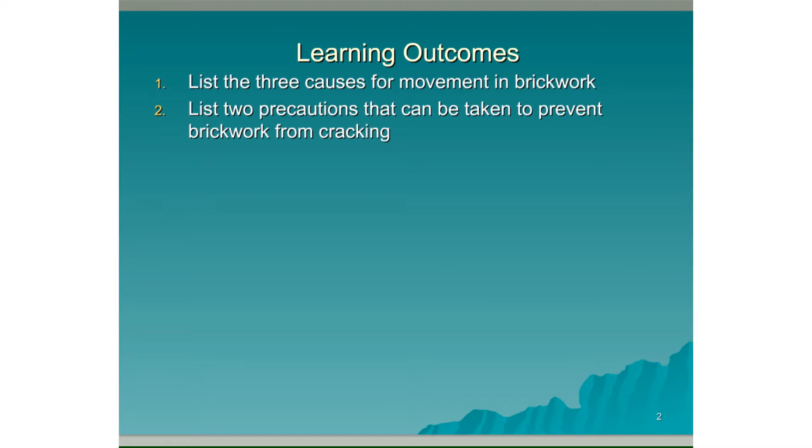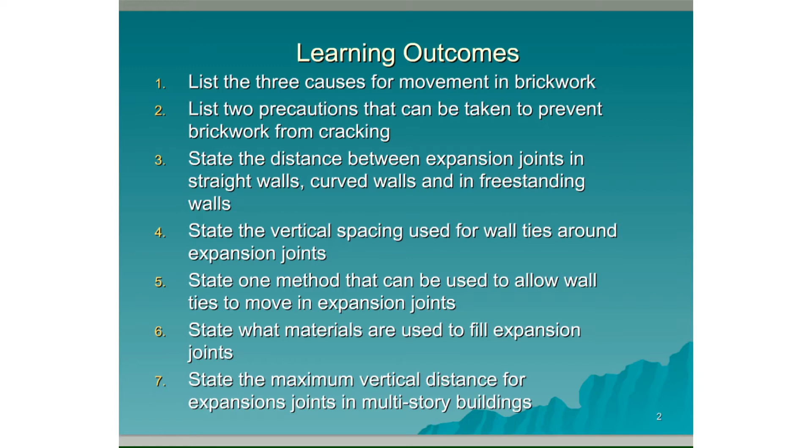Learning outcomes. By the end of this lesson, you should be able to list the 3 causes of movement in brickwork, list 2 precautions that can be taken to prevent brickwork from cracking, state the distance between expansion joints in straight walls, curved walls and freestanding walls, state the vertical spacing used for wall ties around expansion joints, state one method that can be used to allow wall ties to move in expansion joints, state what materials are used to fill expansion joints, and state the maximum vertical distance for expansion joints in multi-storey buildings.

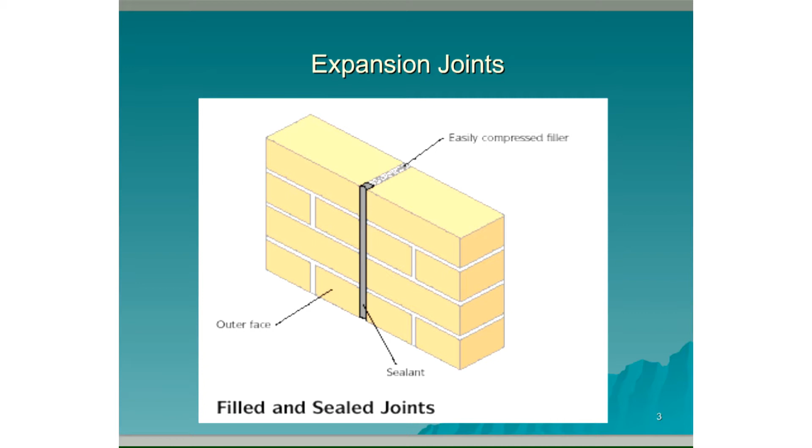Here is an example of an expansion joint made in brickwork. Standard expansion joints are approximately 10 millimeters in width. We can see that the main part of the joint is filled with easily compressible filler, something like Flexcell, and then the outer part of the expansion joint needs to be sealed from the weather, so usually with some kind of silicone.

Expansion joints. All building materials are subject to movement in use. Brickwork is no exception. This movement within the structure is in response to various temperature changes, moisture content, and variation or deformation under load of either the material itself or adjacent materials.

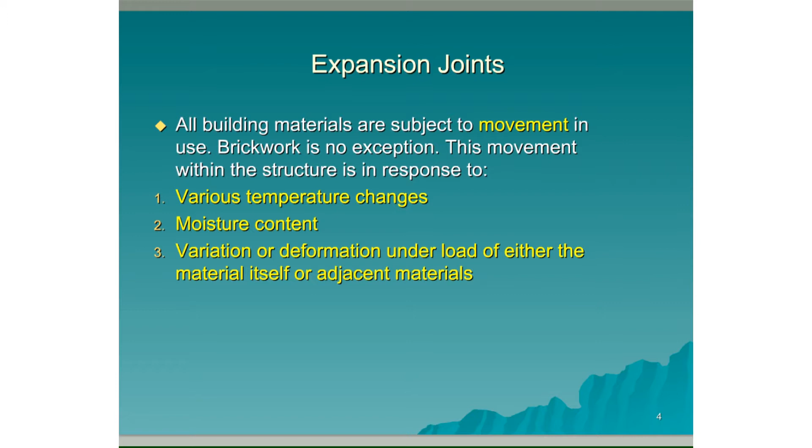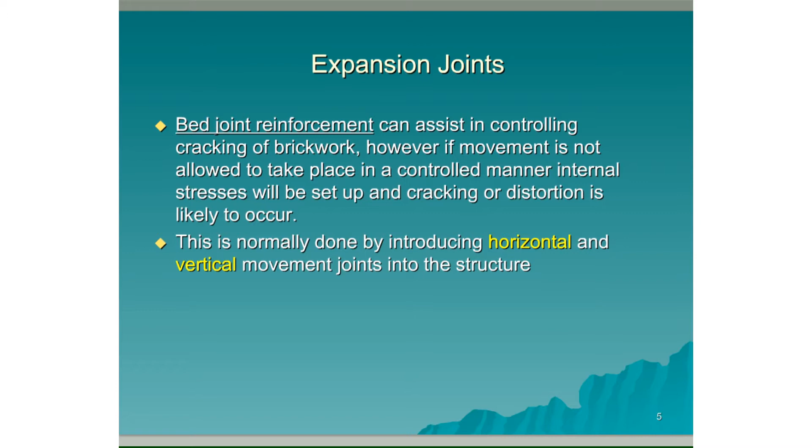Bed joint reinforcement can assist in controlling cracking in brickwork. However, if movement is not allowed to take place in a controlled manner, internal stresses will be set up and cracking or distortion is likely to occur. So we have to allow for this movement. This is normally done by introducing horizontal and vertical movement joints into the structure. Here we can see an example of an expansion joint in a brick-faced building.

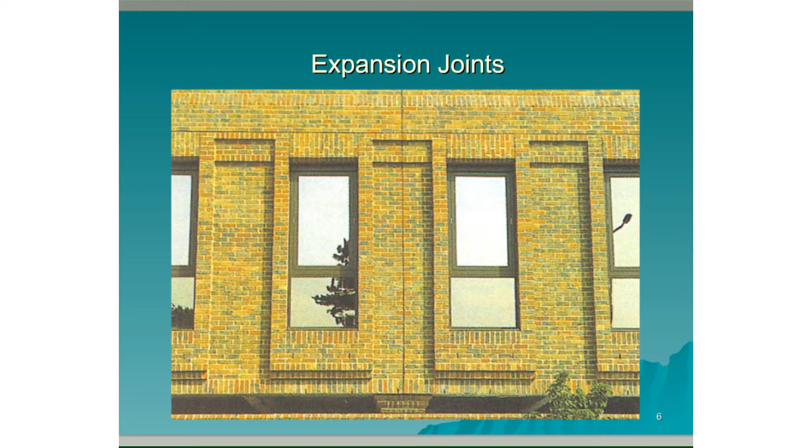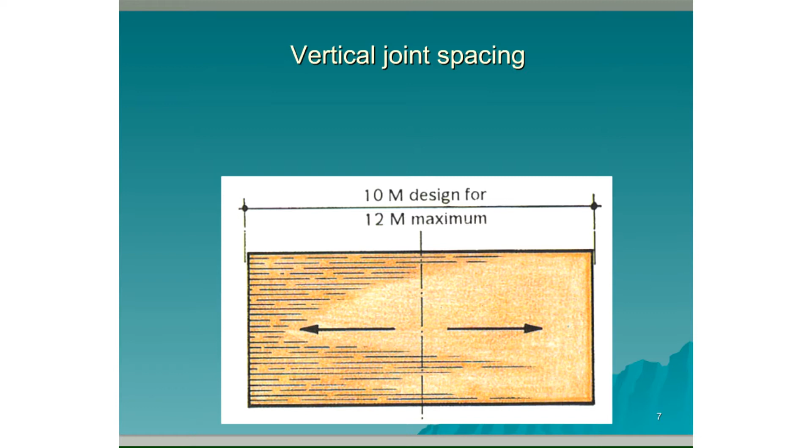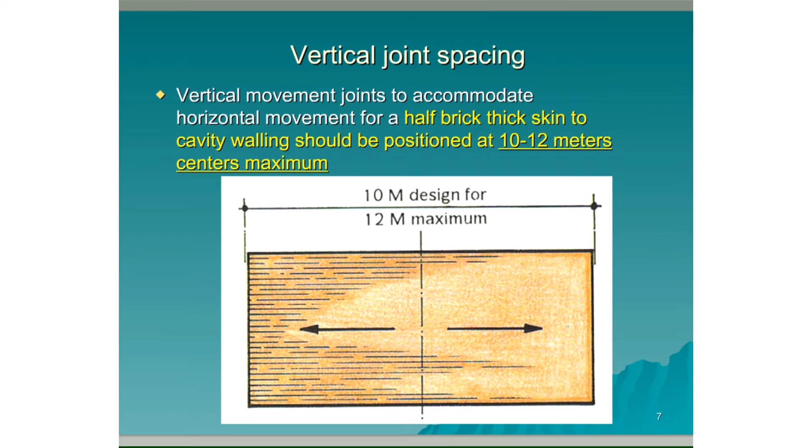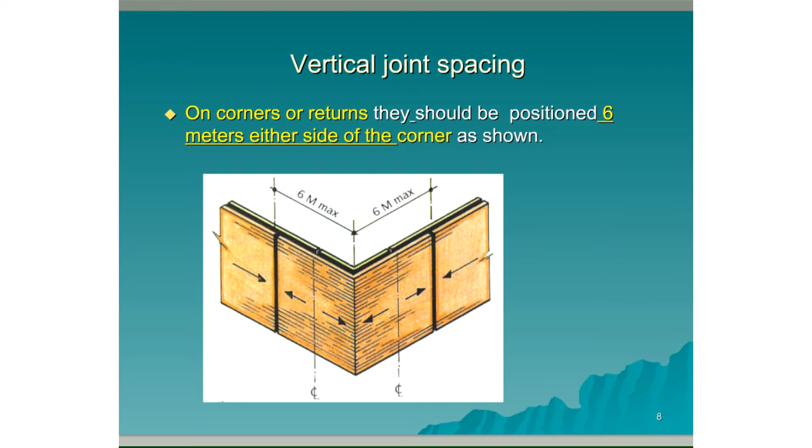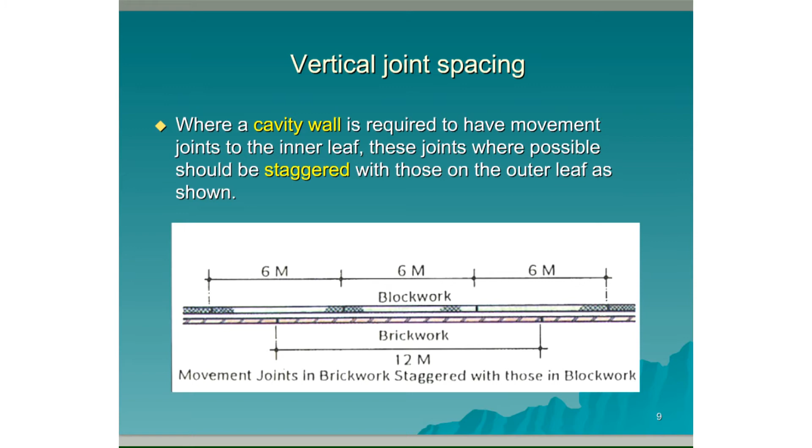Movement joints in brickwork staggered with those in blockwork. Where a cavity wall is required to have movement joints to the inner leaf, these joints where possible should be staggered with those on the outer leaf as shown below. This is to avoid having a major weak spot in the building, and also to avoid the likelihood of moisture penetration through the face of one expansion joint and then travelling through to the inside through another expansion joint.

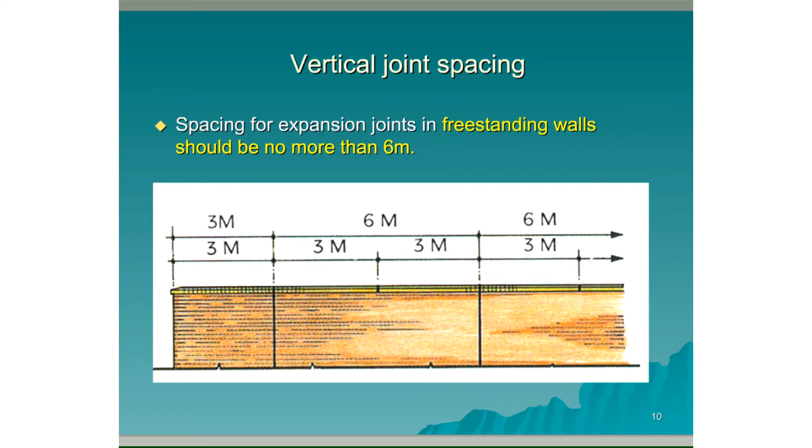The spacing for expansion joints in freestanding walls should be no more than 6 metres apart. It should, however, be noted that copings on these walls should have movement joints at intervals of 3 metres. This is due mainly to their exposed nature and having less restraint.

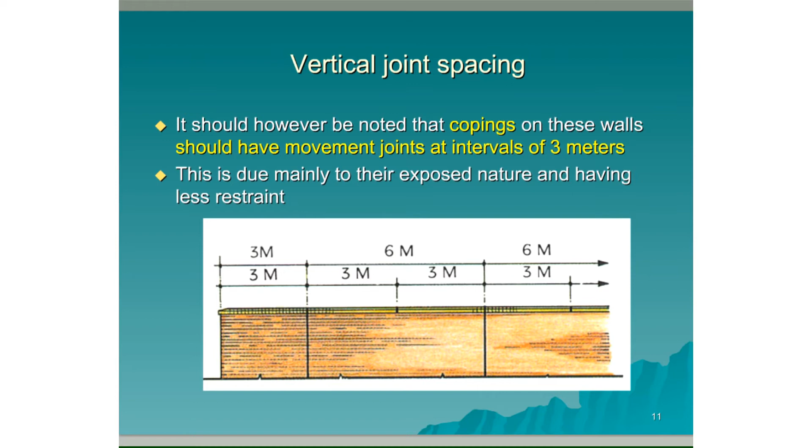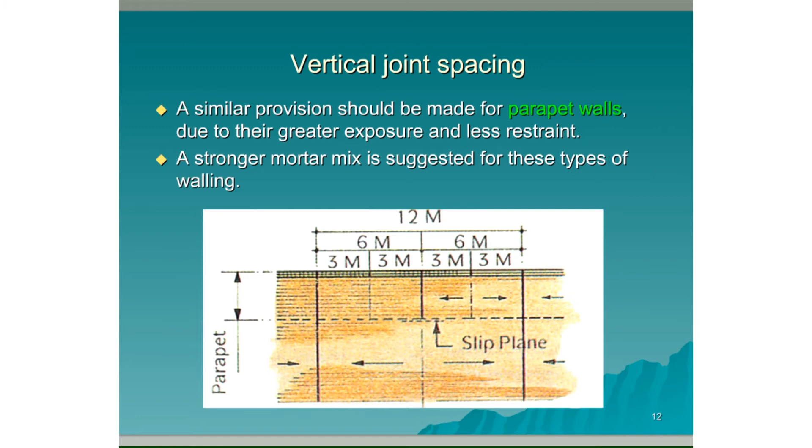A similar provision should be made for parapet walls due to their greater exposure and less restraint to expansion and contraction. A stronger mortar mix is suggested for these types of walls. So we can see for the parapet wall, the expansion joints should be every 6 metres, and on the copings on top of the parapet wall, the expansion joints should be every 3 metres.

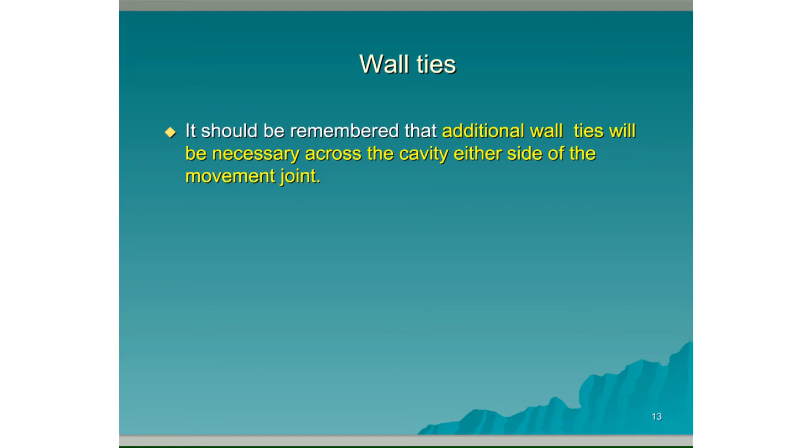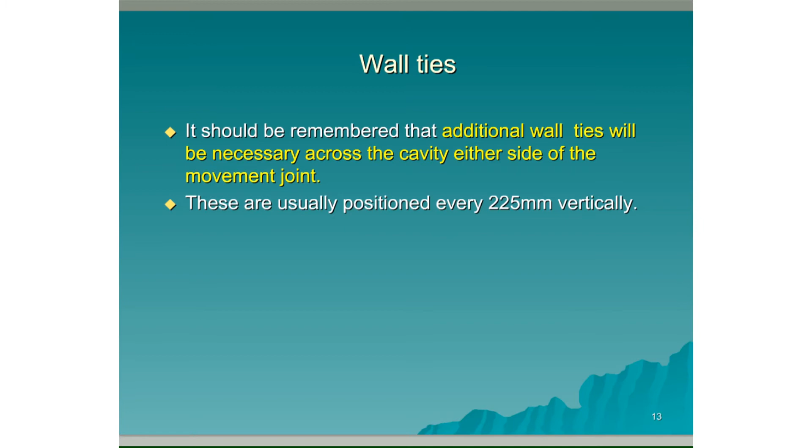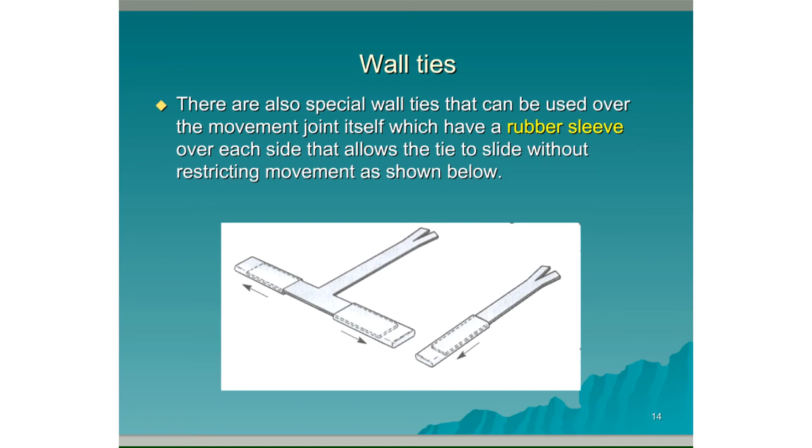Expansion joints. All movement joints should be filled with the correct material, such as a butyl rubber, silicone or Flexcell. The important thing is that whatever filler is used, it's resistant to weather and also allows or doesn't restrict the movement of the brickwork.

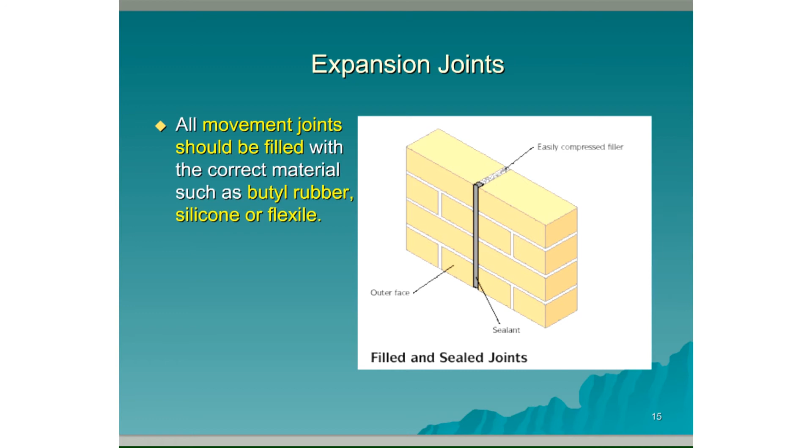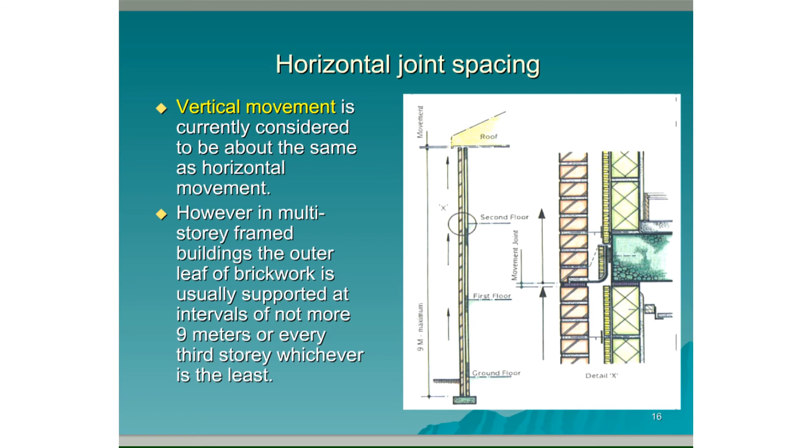Horizontal joint spacing. Vertical movement is currently considered to be about the same as horizontal movement. However, in multi-storey framed buildings, the outer leaf of brickwork is usually supported at intervals of not more than 9 metres or every third storey, whichever is the least. It is common practice to incorporate a support at every second storey, thus providing opportunity to locate movement joints with reduced thickness.

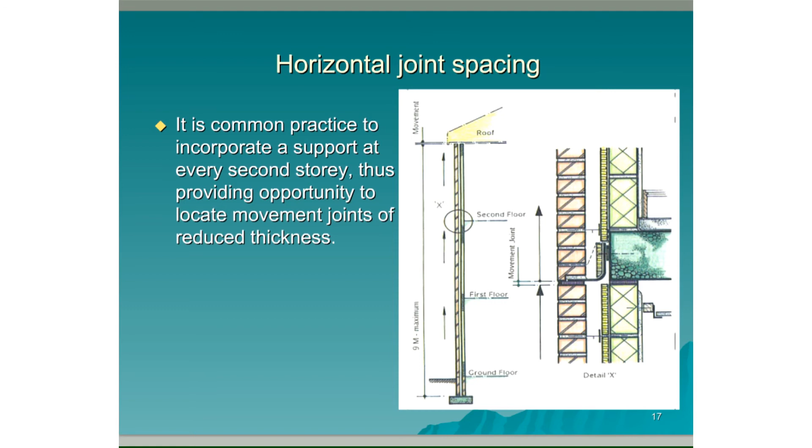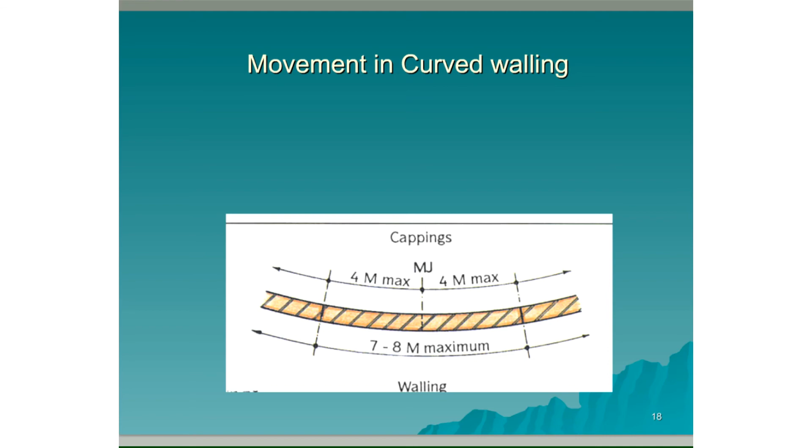Movement in curved walling. Movement joint spacings should be at intervals of 7 to 8 metres maximum. Coping and capping courses should have movement joints at half of this distance. So we can see in the diagram below, for the main walling itself we have the expansion joint every 7 to 8 metres, and then on the cappings we have approximately 4 metres each.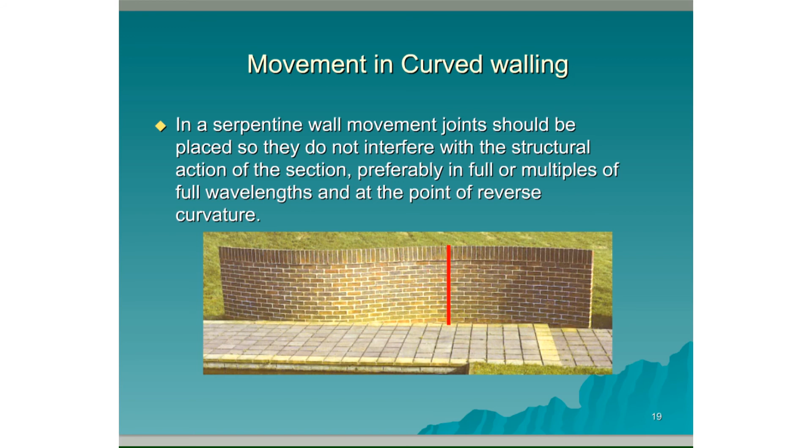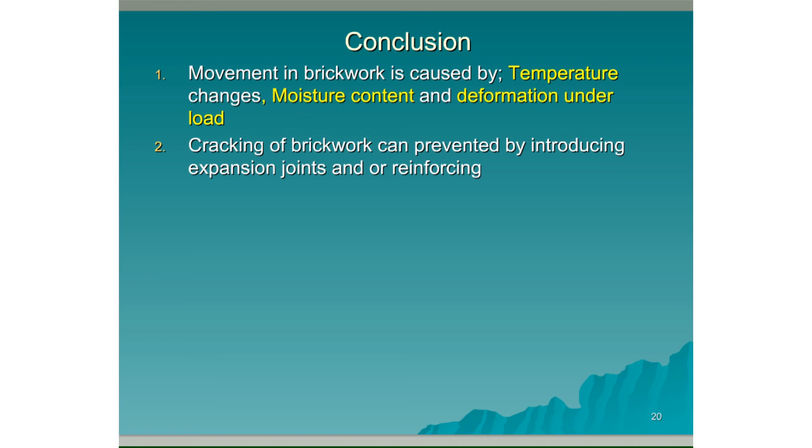Conclusion. Movement in brickwork is caused by temperature changes, moisture content, and deformation under load. Cracking of brickwork can be prevented by introducing expansion joints and/or reinforcing. The distance between expansion joints should be 10 to 12 metres for straight runs, or 6 metres around corners. Should be 8 metres for curved work and 6 metres for freestanding walls.

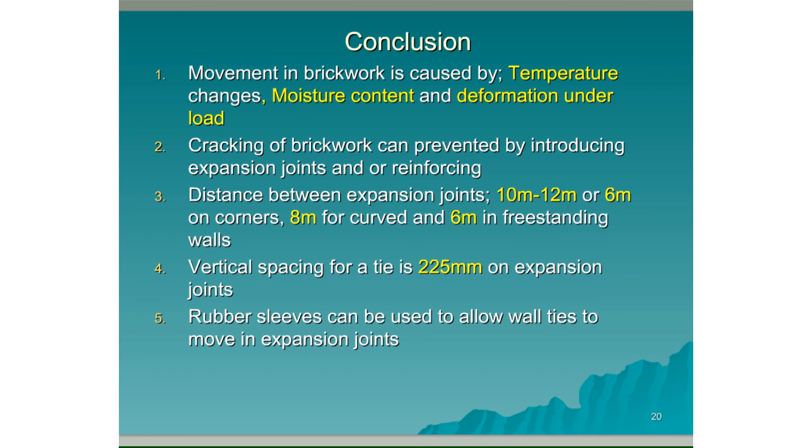The vertical spacing for wall ties on either side of the expansion joint should be 225mm. Rubber sleeves can be used to allow wall ties to move in the expansion joint. Expansion joints are filled with a compressible filler and faced up with some type of silicone. And the vertical distance for expansion joints in multi-storey buildings is 9 metres.